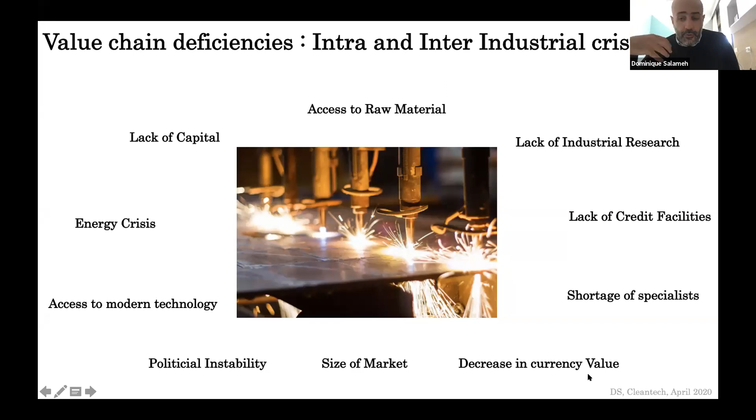So again, in a classical way of definition, you may have in mind that value chain is like the model of Porter's value chain, in picture, or some organizational schemes. This is true, because even this is lacking here in Lebanon.

Nevertheless, we will focus today on waste - solid waste, liquid waste, leachates - and its potential to fill gaps in the industrial value chain. As defined by the World Business Council for Sustainable Development, as well as the full product lifecycle analysis, waste is at the heart of the value chain. We can really see the terminology disposal and recycling, consumption and recycling, within the value chain logic, the industrial value chain logic.

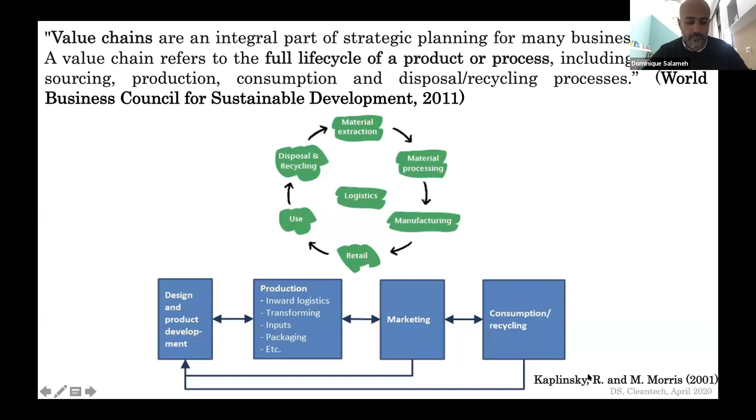In reality, and contrary to the common definition that waste is a no-longer-needed object, today we all know that waste is a subjective perception, as well as a process classification.

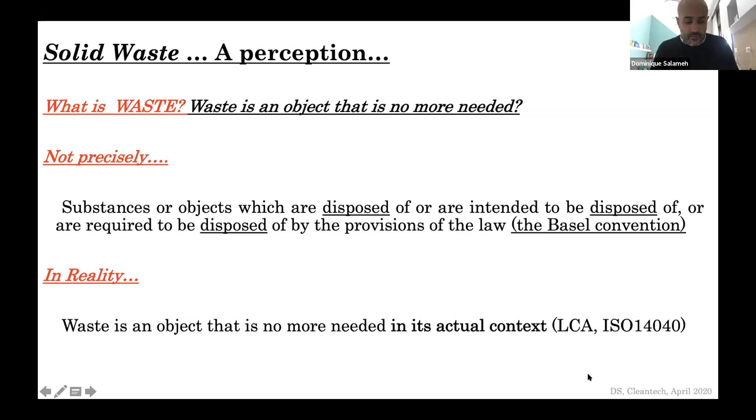Proper definition: an object that is no longer needed in its actual context, not in general - just for me, and now I do not need it.

Let us go into some examples. Practically, let us consider that process.

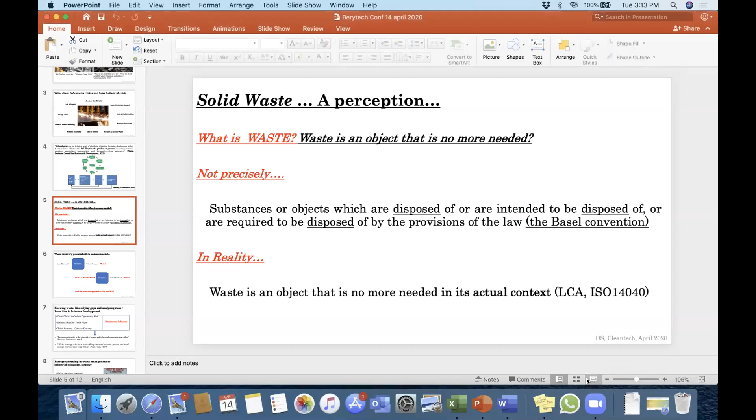I was saying just quickly that waste is an object that is no longer needed in its actual context to me. So let us take some examples.

If I am the person considered process A, I use a jacket, I get warm for a period of time in my life, and I no longer consider my jacket useful. I will put it in garbage - it is waste for me. Still, the jacket is a material that after processing - and here I highlight the terminology 'after processing', I will explain it later - is really useful for another user or for the textile industry.

Many examples in international or national benchmarks can be cited here, but I will just mention the Desigual model.

So the question is not the logic behind everything I'm saying here. If you noticed, I always mentioned 'after processing.' This means we must always have a revaluation process to make waste useful.

Financially, is it worth it? That question drove international economy for long decades. Countries prefer to produce what is lower cost, and where it is lower cost, to produce it there. Resources were abundant in time, and in-house production was not always a strategy - at least in Lebanon. Lebanon was in that economy model.

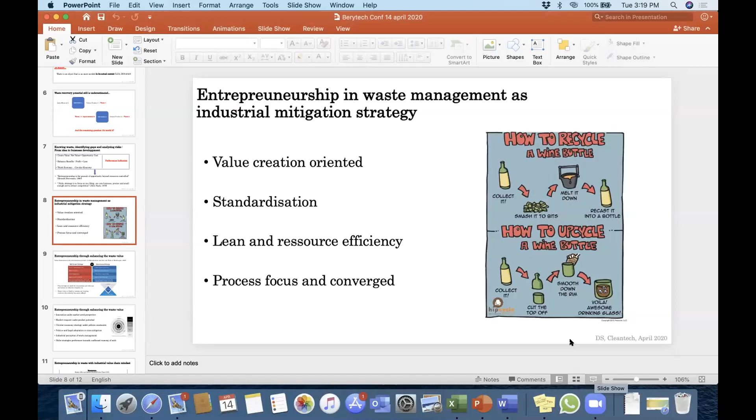So I was saying that entrepreneurship in waste management should be a mitigation strategy for industrial deficiencies in value chain. Because industry is about value creation, is about standards, is about lean and resource efficiency. It's about focus and conversion into one process.

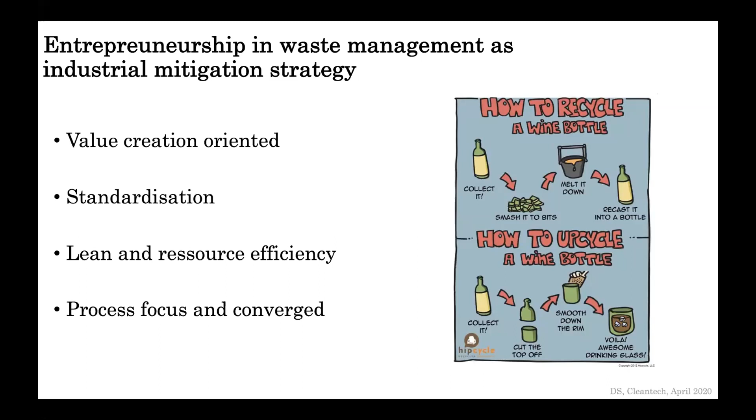And the feasibility studies should lead us to answers like, should I recycle or upcycle? And it's the market who will prime to answer on such question. Now, everything should be designed under what is called blue ocean strategies, not ancient classical strategies, to reach the entrepreneurship in solid waste management. The importance of knowing our baseline.

What is being done with our waste? What are our waste? What is the composition of our waste? What are the industry's need for our waste? What is the production of our waste? What are the plans in the countries for our waste? Blue Ocean strategy is to know exactly what everyone else in the ecosystem is competing on and to do something else, highest in value, lowest in cost, crucial in the value chain.

Let me give you some examples. If everyone wants to produce compost, go and create a lab for soil analysis. If everyone wants to burn waste, go and create local made filters. If everyone wants to recycle plastics, create link between producers and recyclers. Industry is about planning.

Enhancing the waste value is really challenging. Here I am listing a list of criteria which are prerequisites to such innovation, such as innovation under market need perspective, a market conquest under product potential, circular economy strategy under policies constraints, and so on. I will just focus on one example or several.

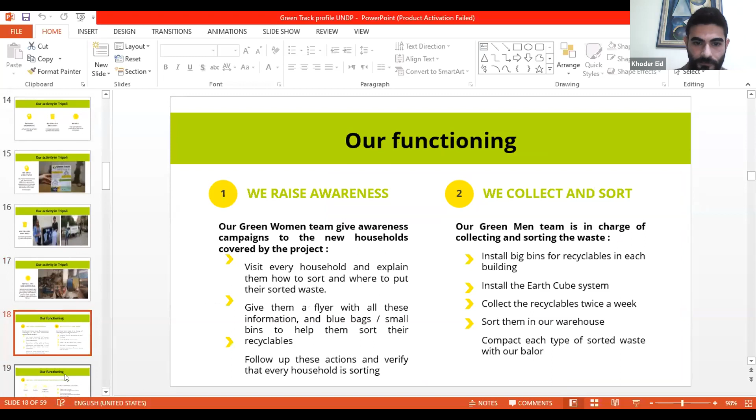Another example of how we can educate in Lebanon about sorting at source.

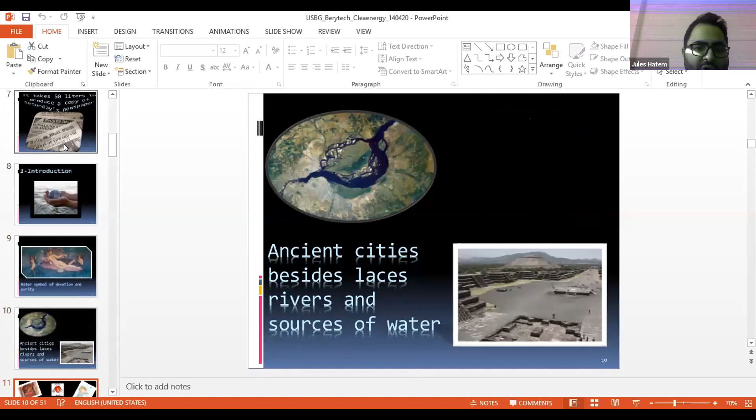Okay, great. So as we know, water is very essential in our life and critical. We use water to produce everything that we eat, everything in our life. For example, it takes 5,000 liters to produce 1 kilogram of rice. It takes 500 liters to produce 1 orange. It's a bit shocking, these informations. Water is the meaning of life. It enters our organism in every component.

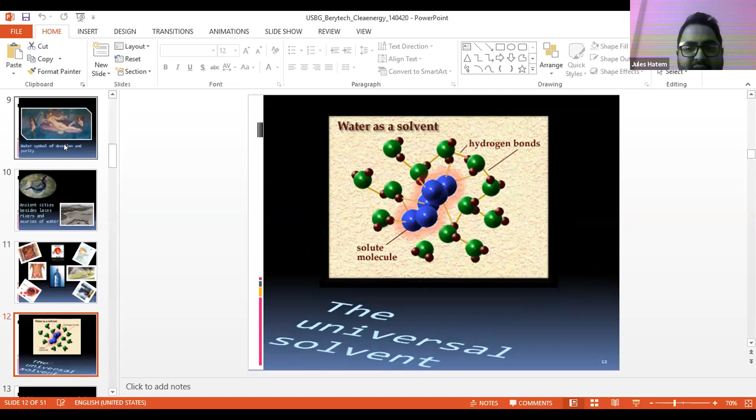The problem with water, and at the same time its characteristic, is that it's a universal solvent. It can dissolve a huge number of particles. This is an advantage and at the same time an inconvenience, because it can contain organic matters, inorganic matters, domestic sewage, industrial waste, microorganisms, etc.

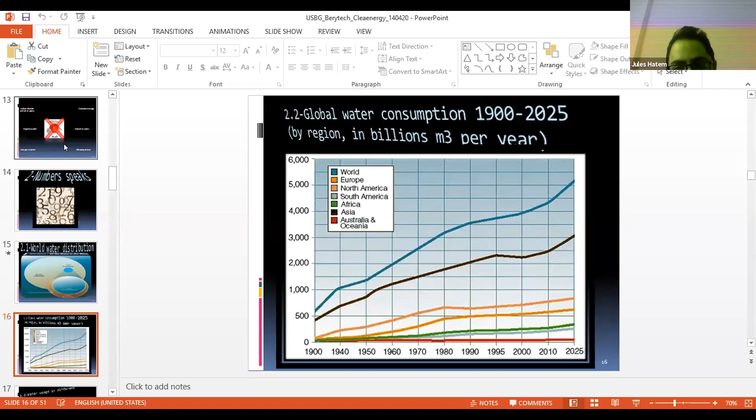Let's talk a little bit about numbers. For example, only 0.3% of our water in the world is usable for us. And the consumption of water is growing in an exponential phase. It's like the corona graph, you can see it every day on the news. So the consumption of water is a bit looking like the corona graph.

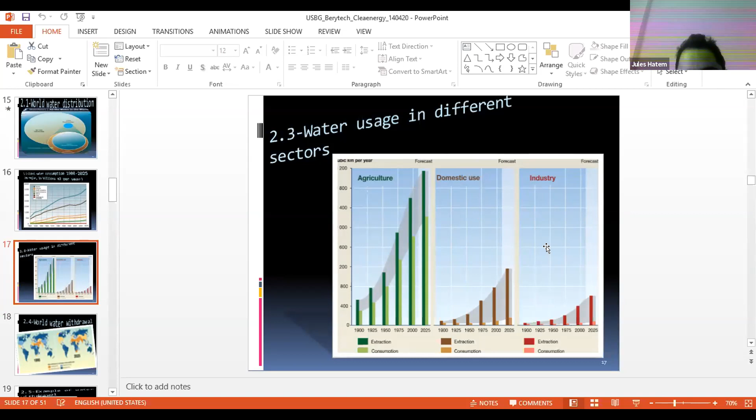And if we can see it in the domestic use, the difference is huge. So we preferred in Triple E, our firm, to concentrate on this part, the domestic use.

58% of the water is used outdoor and 40% is used indoor. Unluckily, we cannot control the outdoor usage on a personal level, but as for the indoor usage, we can interfere, and we can interfere with high efficiency.

In the indoor usage, 30% is for toilet flushing. So if you use, for example, 200 liters per person per day, more than 60 liters is only for toilet flushing. For clothes washers it's 23%, and for the faucet it's 14%.

The problem of centralization and decentralization in the reuse and management of wastewater is very essential here in Lebanon, because there's a big dilemma. I will take my time on this slide, because there's a big dilemma in our market, our state, and our government about whether to go for a centralized or decentralized solution.

Theoretically, centralized solutions for wastewater are more efficient in a powerful nation where there's a good government with high funds, high liquidity, and high decision making. But in a weak country like ours, especially regarding money and decision making, it will cause a big problem.

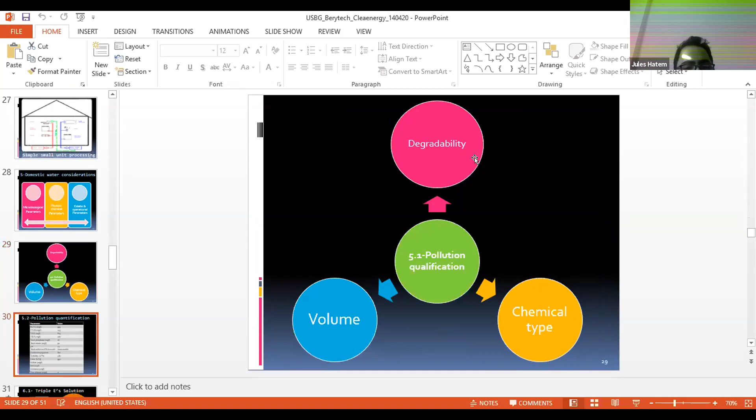So EEE took into consideration the wastewater problem and looked into different parameters - microbiological, physicochemical, and aesthetical - for the wastewater, through qualification of the volume, degradability, and chemical types, and quantification of the pollution, and offered compact or small micro wastewater treatment plants.

The innovation in this product is that it's very flexible. It can be fixed or mobile. Fixed, it can be a concrete underground tank with incorporated machineries to treat the wastewater. I'll explain a little bit about it.

Or it can be mobile - a steel structure tank, or even a plastic tank that can be a compact plug and play. So we can install it one day here in our village beside my house, and then move it to another house. Very flexible.

It can be above the ground and exposed, and it can also be underground.

It has a capacity to treat 1 cubic meter per day, equivalent to 1,000 liters, which is the consumption of 5 ordinary people. So it's for a family or small household, and it can go up to 250, 500, 750, and up to 1,000 cubic meters per day, treating water for a village of 5,000 people, but not more.

As I said before, I am focusing on decentralized solutions that can be adapted by the private sector. Very huge treatment plants are not affordable by the private sector - that's the duty of the state. But while waiting for the state to take that duty seriously, we have to solve our problem.

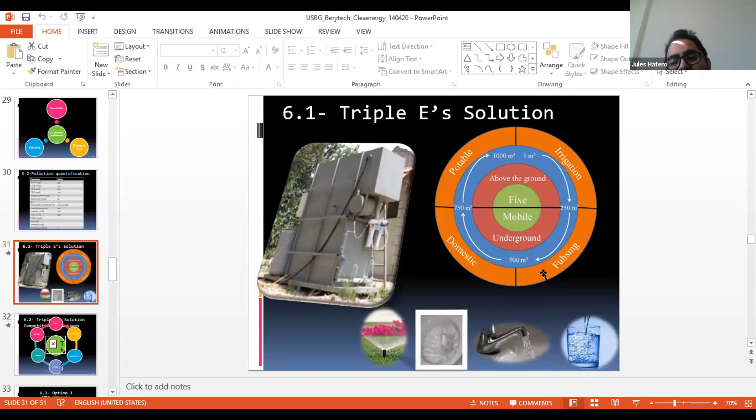But of course, the direct and operational cost for potable water treatment plants is high. So mainly and basically in Lebanon, we are going for irrigation and toilet flushing - treatment of black water to reuse back into green areas, or reuse as gray water for toilet flushing.

As I said before, the advantages of this plant are the price - it's very affordable for a small household or even a building of 6 or 8 apartments. The technology used can be advanced or moderate, based on the request of the customer. The maintenance is easy and can be done by ordinary people - no need for technicians or qualified engineers.

The consumption of energy is moderate. It's a patented technology and it's very flexible. As I said before, it can be used for different purposes, and it can be installed above the ground or under the ground, made of concrete, steel structure, etc.

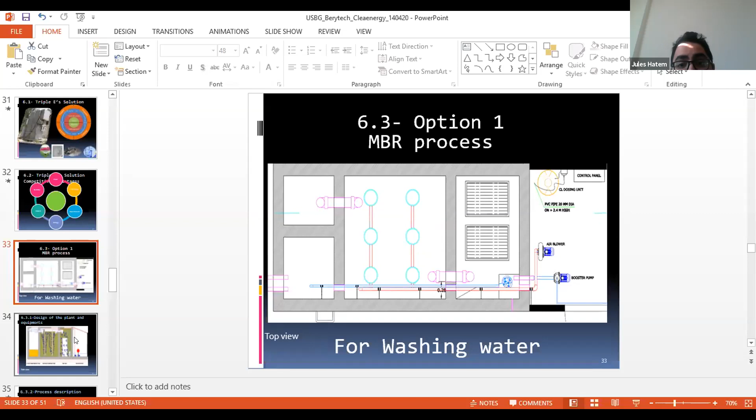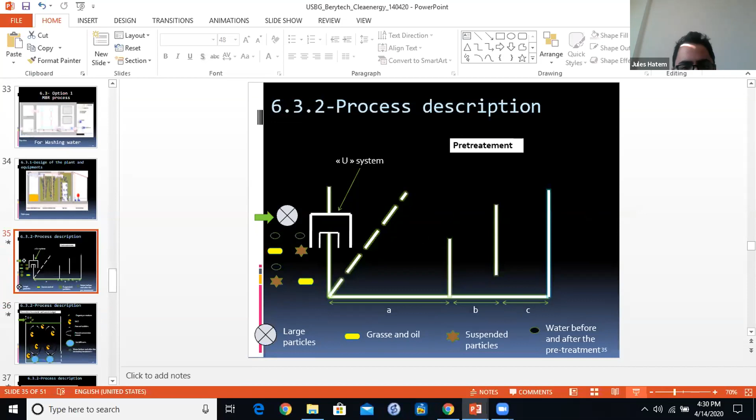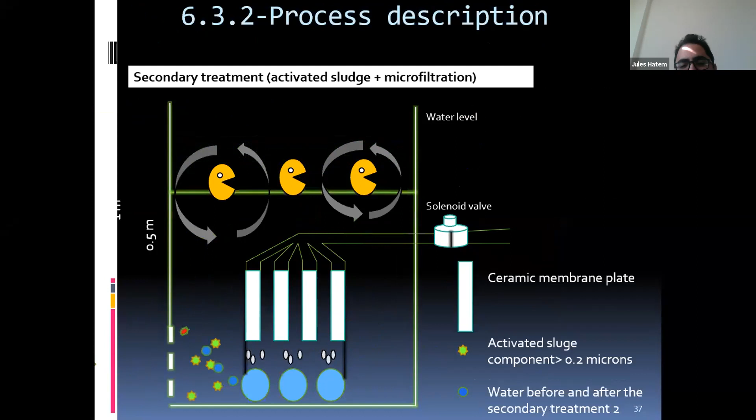Of course, we go through pre-treatment - a physical treatment to remove big particles we can see in the water. Then we go to biological treatment, a biodegradation done by bacteria based on dissolved air in the biological treatment tank. Then we go into the membrane process, the mechanical process, to do microfiltration and get very high quality water.

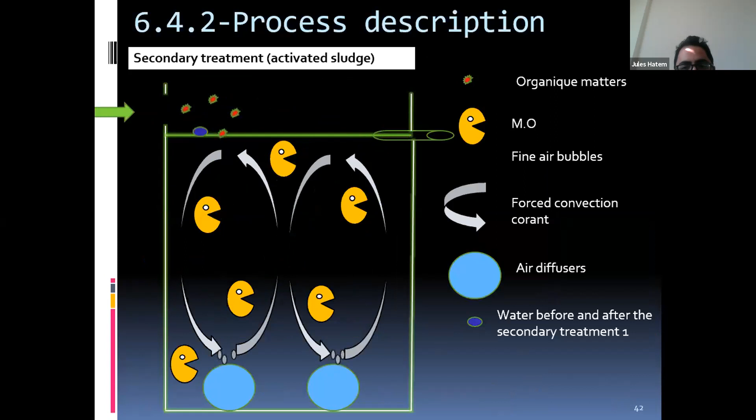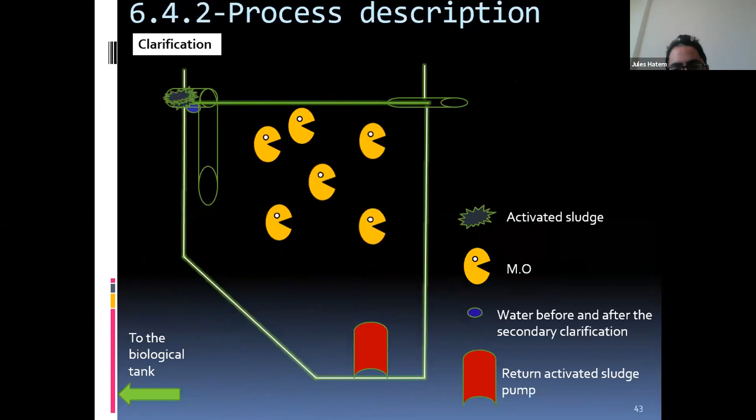If we don't want to use the water for drinking, we can go for irrigation water instead, which is a less sophisticated system with less energy consumption and direct cost. It's based only on pre-treatment, a biological treatment to remove pollutants like BOD, COD, phosphate, and nitrate, then classic sedimentation to settle the sludge for reuse and clarify the water to be aesthetically acceptable. Then a disinfection system removes microbiological components like bacteria and viruses, and the water can easily be used for irrigation.

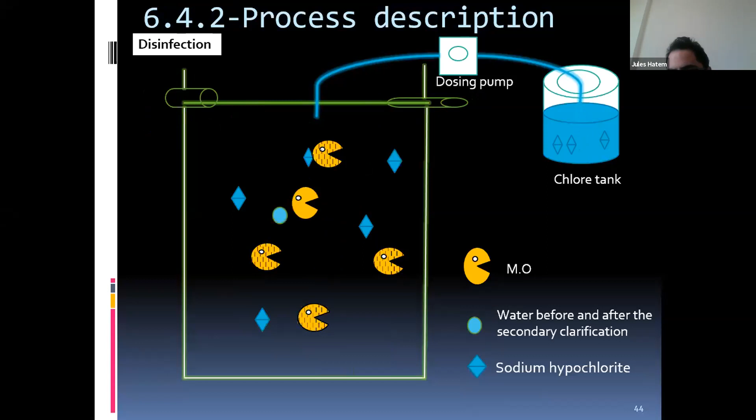Maybe I passed my time - I think so. So I am now ready, I won't continue with the presentation. I am ready to receive questions.

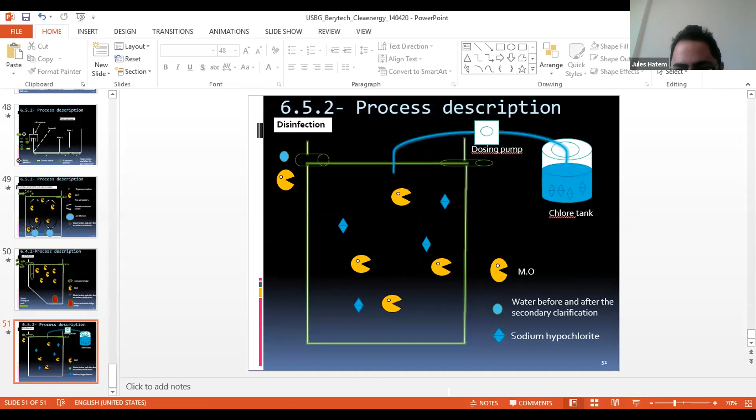What is the cost of such a solution for use up to 10 people, and running cost for irrigation? And is it available as a final product? Yes, of course, it's available as a final product. We've been providing these solutions across the country since 2012, so it's been 7 years that we've provided hundreds of plants.

What is the cost for 10 people? It's 2 cubic meters per day. If you want an ordinary treatment plant for irrigation for 10 people, a compact plug-and-play one made of plastic tanks can go up to 3,700 US dollars. The running cost of the plant is not more than $30 to $40 per month, between the energy and the disposables or chemicals like chlorine.

We have another question regarding cost, about maintenance cost. What spare parts could we need to replace? Is it available in the market? And maybe you can share the implementation cost.

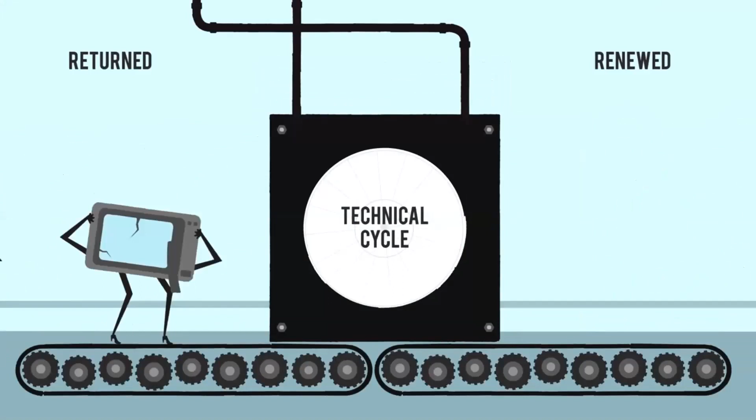It makes commercial sense. Instead of the throw-away and replace culture we've become used to, we'd adopt a return and renew one, where products and components are designed to be disassembled and regenerated. One solution may be to rethink the way we view ownership. What if we never actually owned our technologies? We simply licensed them from the manufacturers.

Now let's put these two cycles together. Imagine if we could design products to come back to their makers, their technical materials being reused and their biological parts increasing agricultural value. And imagine that these products are made and transported using renewable energy. Here we have a model that builds prosperity long term. And the good news is, there are already companies out there who are beginning to adopt this way of working.

But the circular economy isn't about one manufacturer changing one product. It's about all the interconnecting companies that form our infrastructure and economy coming together. It's about energy. It's about rethinking the operating system itself.

We have a fantastic opportunity to open new perspectives and new horizons. Instead of remaining trapped in the frustrations of the present, with creativity and innovation, we really can rethink and redesign our future.

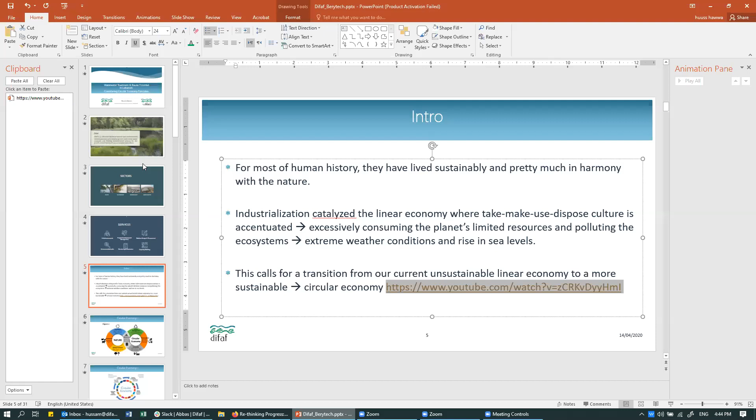Okay, very interesting. Yes. Now we can see your screen. Yeah, great.

Our current linear economy relies on cheap, easily available resources and fossil fuels. So I'm going back to my presentation now, thanks for watching the video. Basically this presentation puts into perspective what I want to provide now.

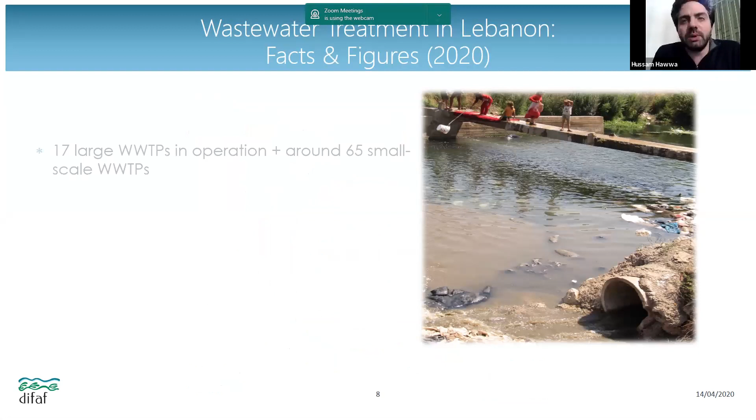Zooming down into our topic, which is wastewater - how does wastewater fit into this? We start from Lebanon. As our colleagues just mentioned, we have many treatment plants that are not really operational, although on paper they are operational. But we also have 65 small treatment plants - they're doing okay, better than the big ones at least.

But also most of these plants, when we talk small and medium, they have high capex and opex. Most are not operating properly because of lack of funds, lack of know-how, or just corruption, to say it out loud.

And they're not efficient, for many reasons. Some are not efficient because the wastewater networks are incomplete or missing. Or actually they have industrial wastewater in them, because industrial wastewater can impact treatment plants which are not designed for industrial wastewater - this is another issue.

This is why industrial wastewater is a very interesting gateway to start thinking about. One, because Lebanon is not a very industrialized country, and it's a good chance for us to grab these industries before the whole economy becomes too industrialized, and make it into a greener, circular economy based economy.

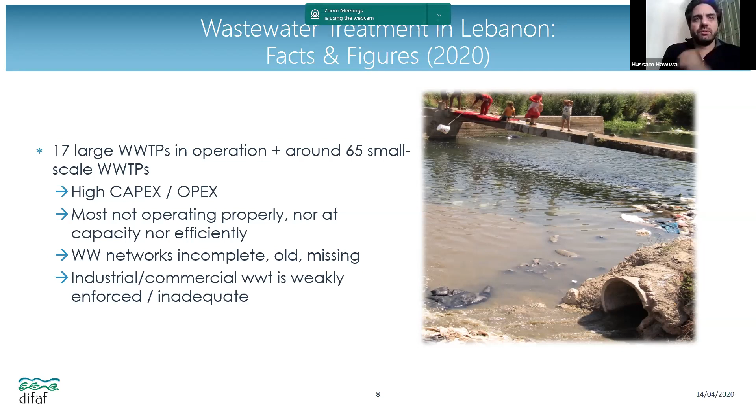So we're talking about the failure of centralized conventional systems, which are linear, as the video showed. Very quickly: we have 260 million cubic meters of wastewater per year. 60% are connected to a network, 40% are not connected. Out of the 60% connected, they go to treatment plants downstream, with 10% going to a functioning wastewater treatment system.

Out of these 10%, 30% are actually only primary treatment. So it's not really treatment - it's basically just a preliminary phase of treatment.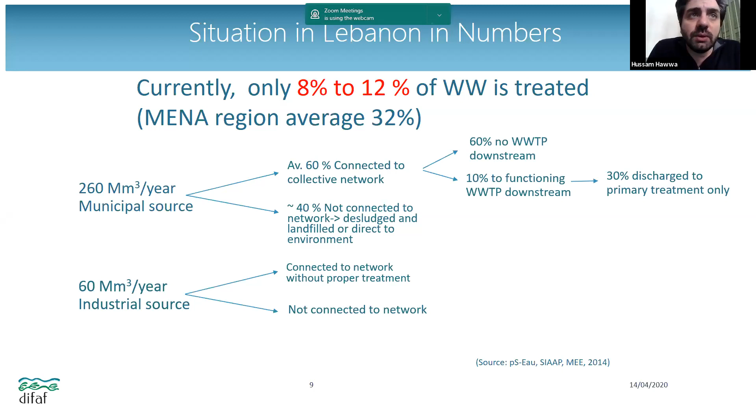From the industrial source side, we have 60 million cubic meters per year - unknown statistics, as my colleagues also mentioned. Dominique said we don't know the statistics of these and we need a lot of secondary studies. So basically some are connected to the network, and some directly dispose into the environment. Those connected to the network actually impact the wastewater treatment plants we've built, making them less efficient. And the ones going to the environment have huge environmental impacts, as we know.

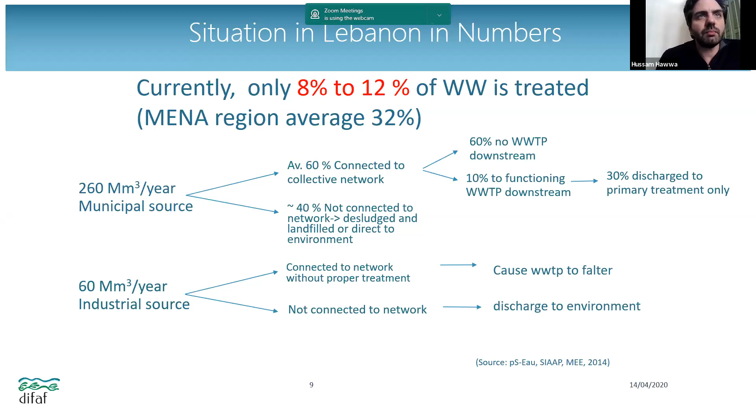Very quickly, treatment plants take in rainwater, domestic wastewater, and sometimes industrial wastewater, as we saw. In Lebanon, we have solid waste generated from these treatment plants - sludge basically - and other waste that go into landfills. We don't have incineration, so it doesn't go into energy production, and we're not officially using them for agriculture.

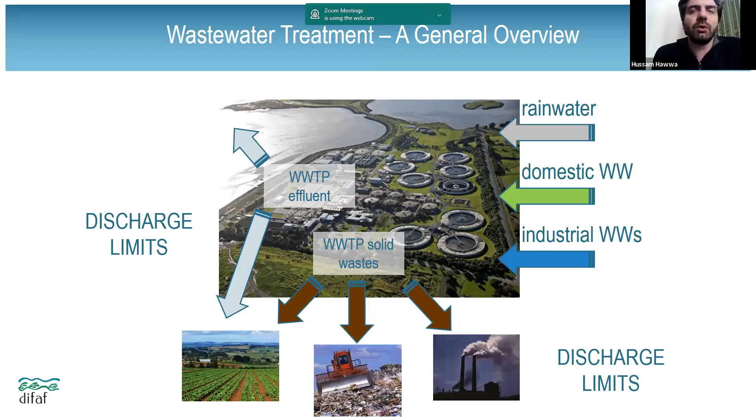Of course, unofficially many things are happening - most of the unofficial work is actually dumping this waste sludge into the environment directly. And from these treatment processes, we also have effluents going into the sea, river systems, or to irrigation, but not really, not yet, because we don't have any legal framework for that.

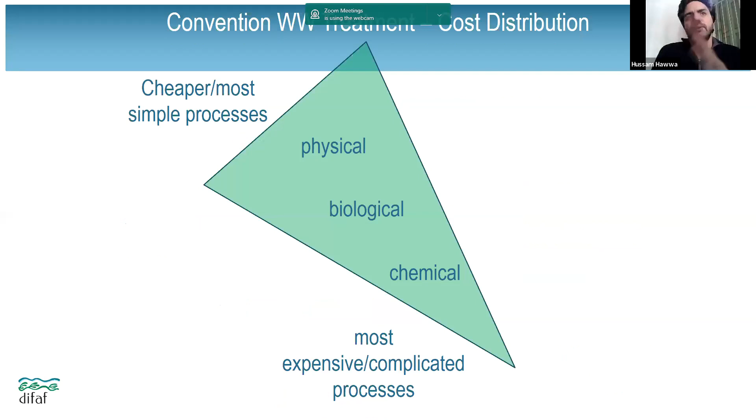Now with the linear processes, I just want to focus on this linearity - physical, biological, chemical - these are the steps usually taken, usually from cheaper to more expensive. So we have raw wastewater going in, preliminary treatment, then clarifier and primary treatment, which is physical. In the secondary systems we also have biological treatment that is sometimes aerobic or anaerobic.

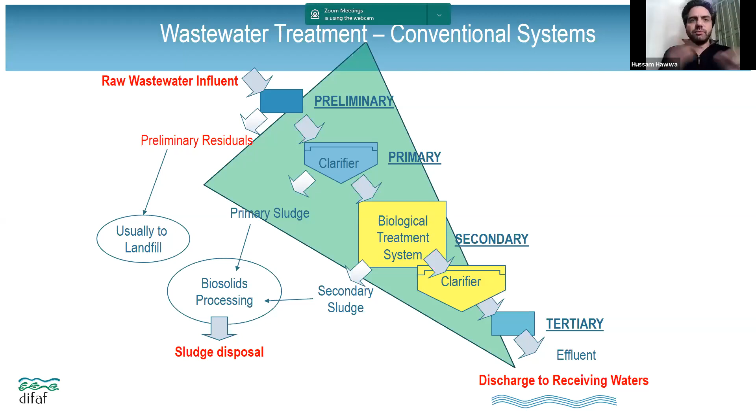And from all of this, we can see on the left side how much waste is actually produced throughout this process. We have sludge from the preliminary residuals and the primary treatment, and sludge coming from the secondary treatment. And of course, in the end, we have water that, if treated well, goes to the environment. If not, it's actually also a waste.

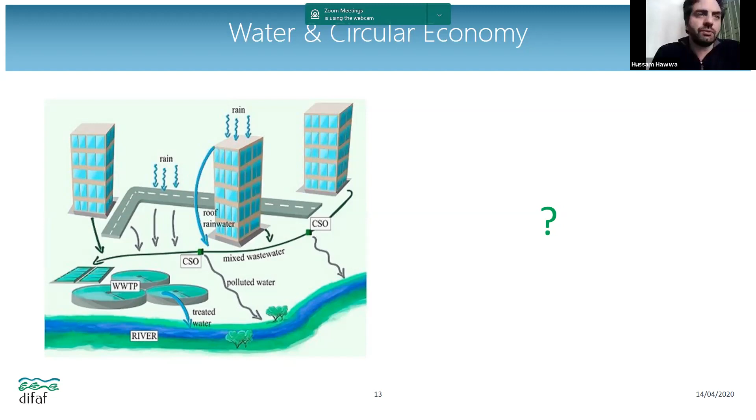However, in the circular economy, we can see how much more possibility and potential we have. First, if we look at the treatment plants themselves, we can look at smaller systems or biological systems like constructed wetlands, where we have less chemicals and lower energy use intensity, and operational cost is much lower. From these systems, we can recover nitrogen and phosphorus to fertilize crops.

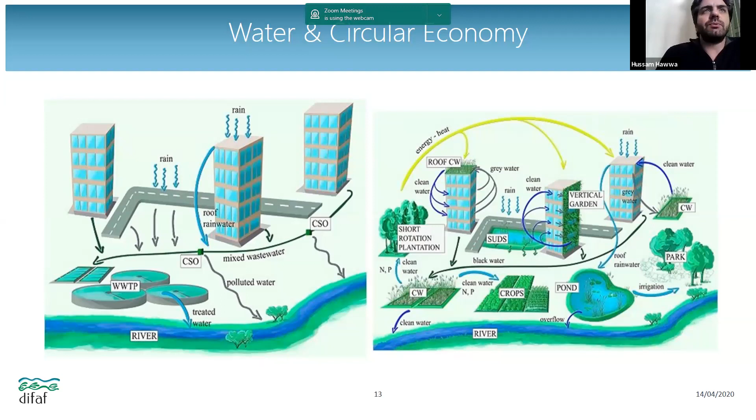And of course, we can talk about rainwater harvesting, where we can feed back into the environment, whether in ponds, irrigation, or the river systems themselves. From these, we can also put wastewater systems on rooftops or in communities at a small scale, or do vertical gardens, etc.

So basically, we have to move from wastewater treatment and removal of biogenic compounds to thinking about priorities where we preserve natural resources, minimize the water footprint, and use these processes in the treatment plants themselves. For example, energy production we can use in the treatment plants to save energy. We're going to see examples in a bit.

For disposal of sewage, we can look at recovery of raw materials, energy production, and disposal. Energy can also come from sewage sludge, and utilization of biogas energy. From there, we can think of recycling that energy into the system, and the surplus energy can also be sold into the network.

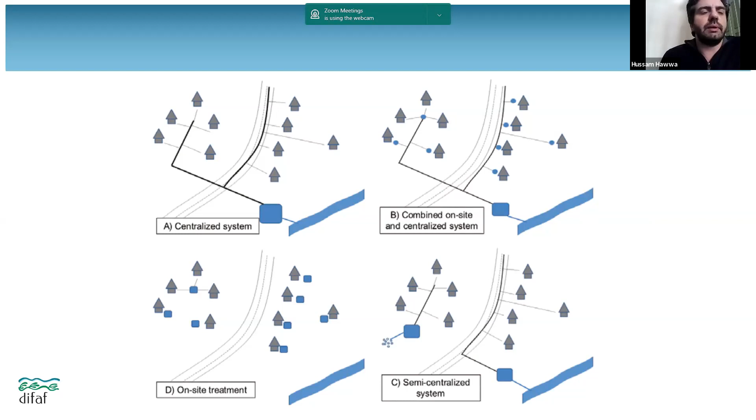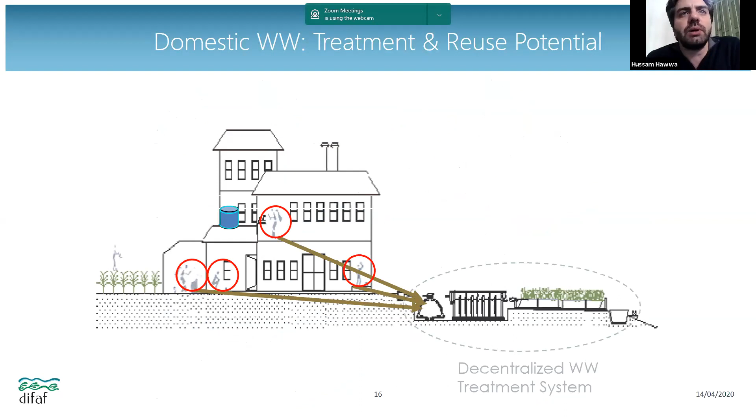Just to give an example of what you can do in the house for wastewater management, here you have different wastewater coming into a small biodigester, and then an anaerobic baffled reactor where it is also treated anaerobically. And then this water is polished with a wetland, and then the water is treated.

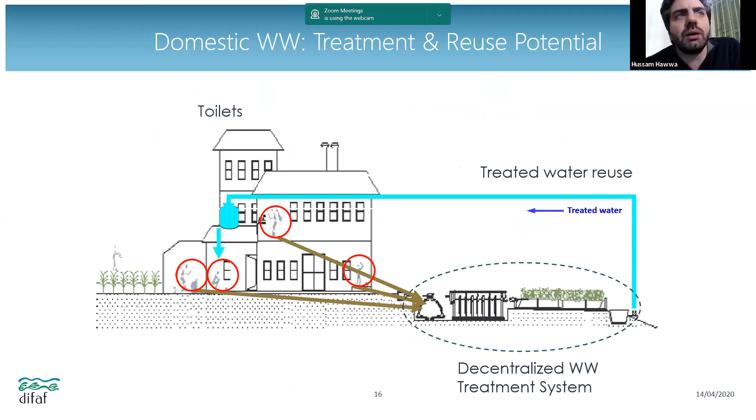This water can be reused in the house for washing, for toilets, and for irrigation, and the treated sludge can also be used as fertilizer. And of course, the water in the end can also go to the river, which is now welcoming this water because it's clean.

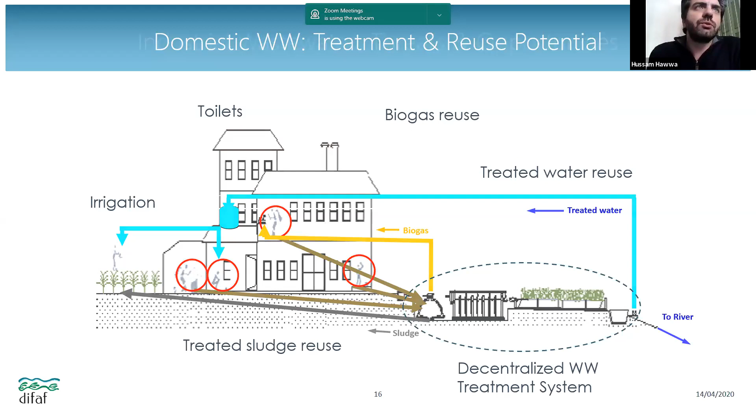So going into industrial wastewater, we have to know that it's a bit tricky. One, because it's very polluting—the BOD is 100 times more than domestic wastewater. It's laden with chemical and heavy metal components, dependent on variable production cycles, expensive and complex to treat sometimes, and expensive in the sense that if you don't recover any of these resources.

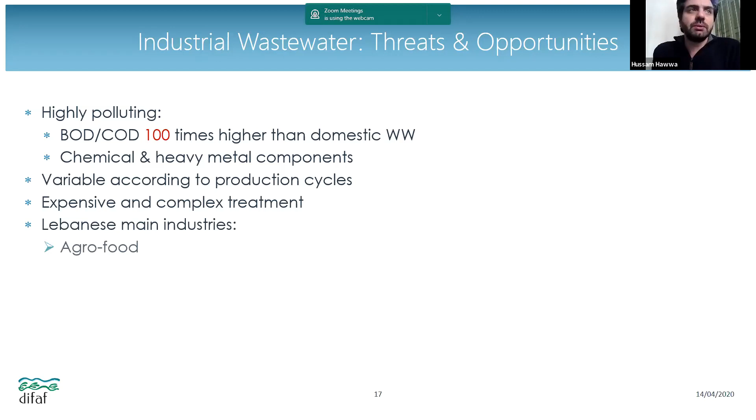Our main industries in Lebanon are, of course, agro-food, construction materials, cement, chemical products, printing, packaging, furniture, and wood. But actually, all of these are still medium-scale industries—they're not really heavy industries.

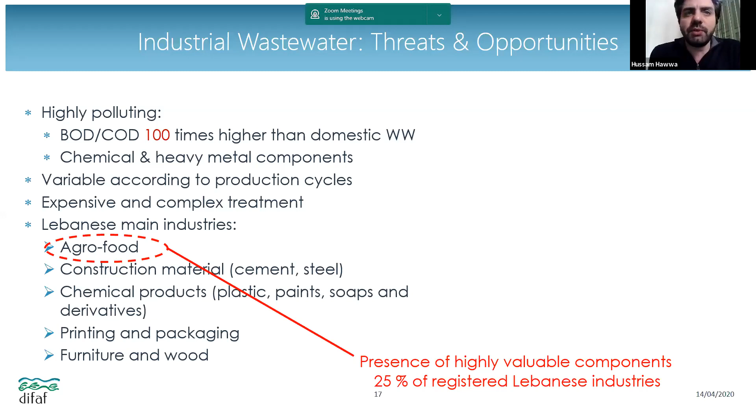In the agro-food industry, it actually has the highest potential for circular economy because it has very valuable components. These almost form 25% of our registered industries in Lebanon.

Just to give you a very quick sneak peek, we have this agro-food coming from slaughterhouse waste. We can use protein hydrolysis in slaughterhouse waste to produce keratin from the hair and collagen from the hide, and amino acids from other supplements or substrates.

In livestock production, we can also produce antioxidants and feed supplements, which we're going to see in a bit.

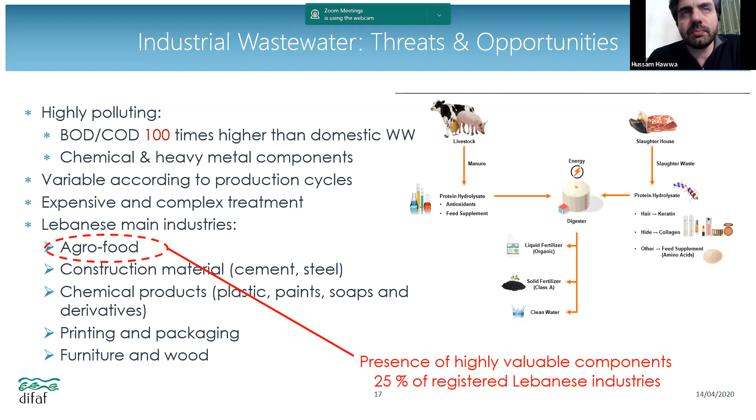The digester itself can produce energy, liquid fertilizer, solid fertilizer, and clean water. This valorization, looking at wastes as resources, is the main topic of today. Throughout all these industries and options, we always have the consistent resource of water, and this is why we love water so much, because it's always there, and valorizing it is always very valuable.

When you reclaim water throughout these industries, you can use it for potable water, agriculture, irrigation, industrial washing, or reuse in the industry itself, domestic non-potable uses like swimming pools and toilet flushing, groundwater recharge for environmental benefit, and return to rivers as an indirect environmental use.

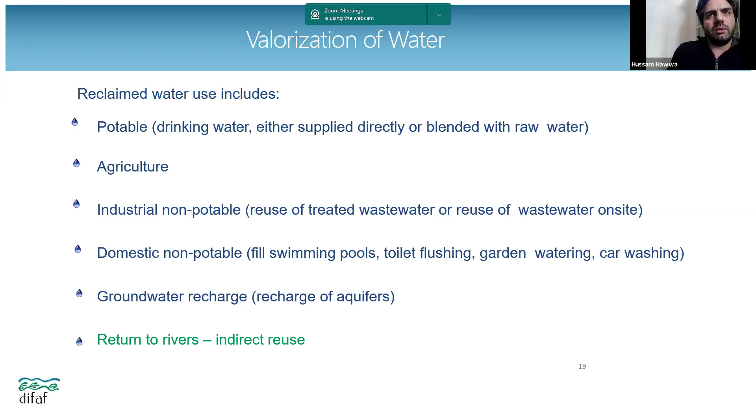Now let's look at some examples, starting with animal farms. From them we can take methane gas through digesters, which is anaerobic treatment. Later, through further treatment, we can get organic ammonia and solid fertilizers for soil conditioning.

We can also further treat the water into very clean water, or not treat it, but the slurry can also be used as fertilized water for irrigation.

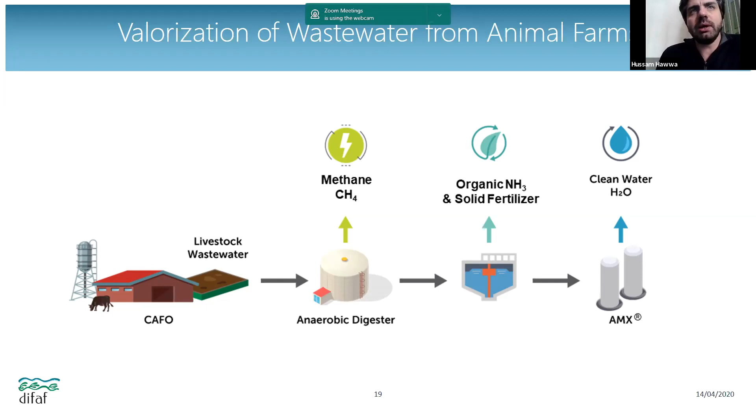If we look at wastewater treatment as an industry itself, we also have a lot of potential, because sludge is a highly biodegradable and important resource for energy. We have many examples in countries using sludge for energy production.

From this sludge we have thickening, dewatering, conditioning, and drying. These are the main processes before putting it in the biodigester that produces methane gas. There's a bit of post-treatment where you have to take off the sulfur, but it's not a big deal, and then this sludge can be used for energy production.

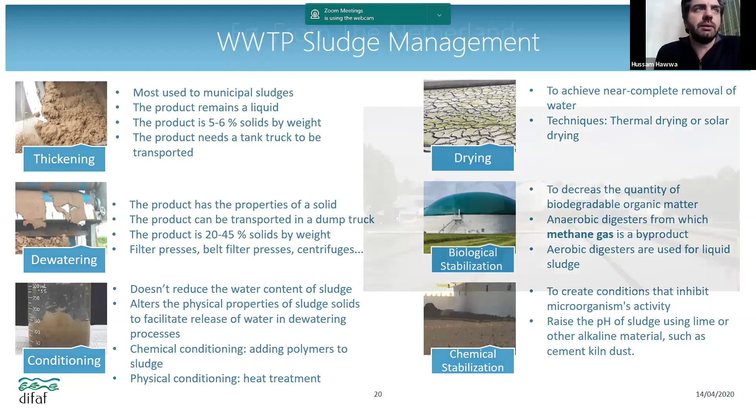50% of the phosphate recovery, called struvite, is sold as fertilizer. The rest of the sludge is dried and used as carbon for energy producing facilities. This all saves around 2,500 tons of CO2 per year, and this is an ideal plant. I'd advise you to look it up if you're interested.

Of course, in Lebanon, one of the biggest industries we have is olive wastewater. We're not going to go through the whole process of olive oil extraction, you'll probably learn it later. The wastes, like olive leaves and wood, can be used for animal feeding or composting.

Other byproducts include olive mill wastewater. We're going to show you very quickly what kind of important pharmaceutical products we can produce from there. Olive cake can also be used as energy for briquette making, and other byproducts like olive stone can also be reused.

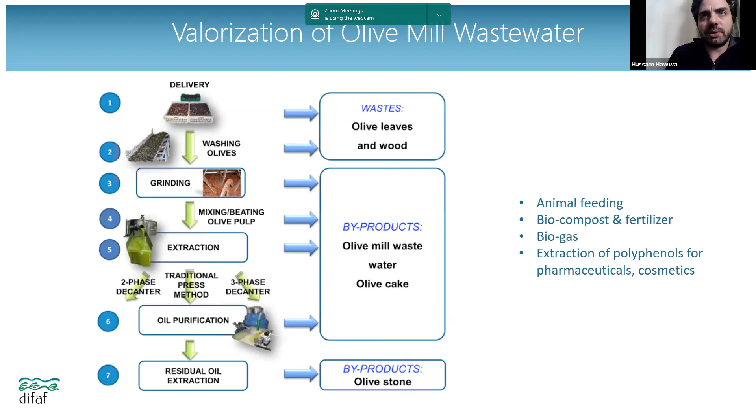So you can see in one industry how much potential use we have, particularly for the water that comes out from this system. We can also get very high value products in the medical and pharmaceutical industries and the food industry, like polyphenols, which have excellent biological antioxidant properties used in medicines and others.

Mannitol is used in pharmacy as a stabilizer for other treatments, along with low-calorie sweeteners. Pectins and oligosaccharides can be used as prebiotics and dietary supplements. Other products can be used for the pharmaceutical industry. All of this can be found in olive wastewater production, and we virtually have none of that.

Why is it not going? It's not moving.

The treatment and recovery products can be used for animal feed if we talk about the stems mixed with leaves. The pomace, through solvent extraction, can be used for dietary supplements. Pomace aerobic biodegradation can turn into biocompost, and pomace can also be used for biogas.

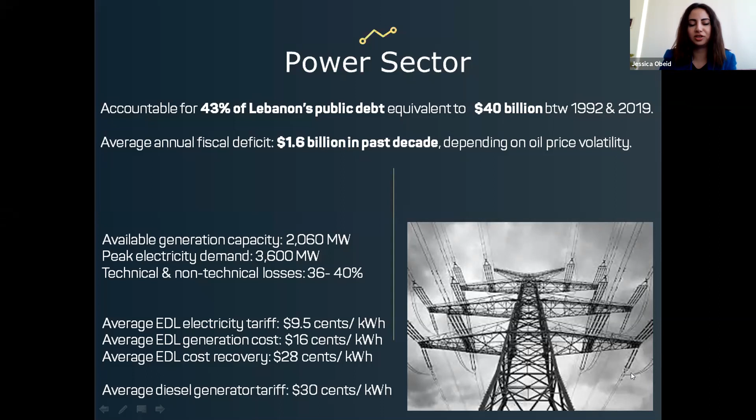And on the other hand, because the electricity utility cannot meet all the demand, and we don't have 24/7 electricity, and we rely on diesel generators, the diesel generator tariff is 30 cents per kilowatt hour.

As we've said, the electricity sector has contributed to 43% of the public debt. We have an outflow of foreign currency reserves for fuel imports because Lebanon imports around 91.9% of fuel for the energy sector. And a large share of that is also for electricity, as we only have installed renewable energy capacity of 7%, and that also includes hydropower.

We have a value of lost load because that electricity that we're not actually generating has a value, and we call it the lost load. And there's a very high cost on businesses. They have high operating costs, low competitiveness, whether we're comparing to the regional or international levels, and we also have low exports.

So the productive sectors in Lebanon contribute around 16% to the GDP, but they employ 26% of the labor force. Of course, employment now is very important because we have a very high unemployment ratio. And if we look at the trends in the Lebanese economy, even when the GDP was increasing, unemployment rate wasn't decreasing. So we have an economy that doesn't create jobs. The employment opportunities are very important.

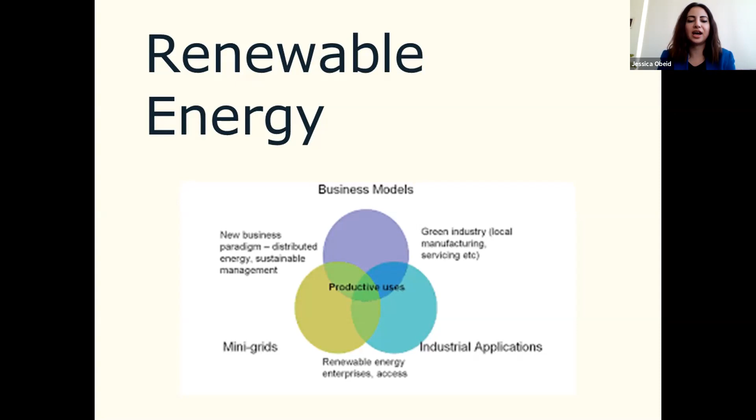If we look at what can provide all of these goals, we end up with renewable energy—especially decentralized renewable energy models—which can support all these productive activities. They can generate affordable, green, environmentally friendly electricity access, enable new business models, drive job creation and innovation, and provide stimulus for the economy. This is very important for Lebanon.

This example is a bit far-fetched, but I'm just showing the potential in different sectors. In Hungary, they've launched a 1 billion euro renewable energy project for agricultural centers on the border with Slovakia and Austria. It will cover 330 hectares, based on renewable energy—both photovoltaic and biogas—and will include a geothermal plant for cooling purposes.

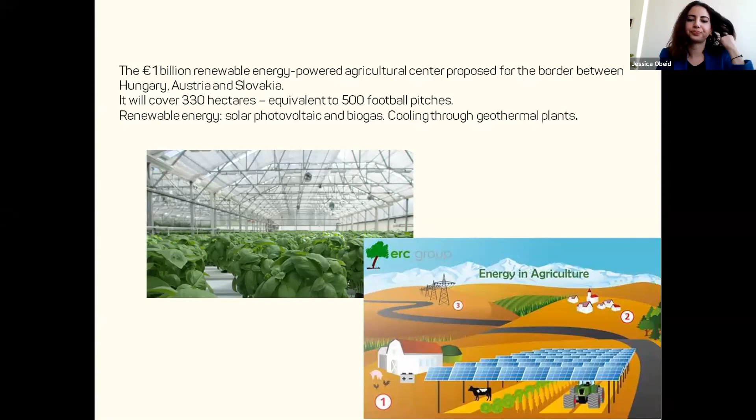Do I still have time?

In the challenges, we of course face several challenges as well, but there are ways probably, and this is where entrepreneurship and startups can play a role in driving new energy models. We definitely have the financing schemes, but Berytech is also providing some sort of financial support, if you're applying for the Cleantech fund.

We have a legal framework, which is the most problematic issue in Lebanon, where by Lebanese regulation only EDL is allowed to generate and sell electricity, unless it's some sort of developer that has a license. But there are also issues with the regulation and licensing, so we don't have a consistent policy. We also don't have a power wheeling mechanism which allows users to implement renewable energy technology in a land somewhere and offset the electricity consumption somewhere else. But we have a net metering scheme.

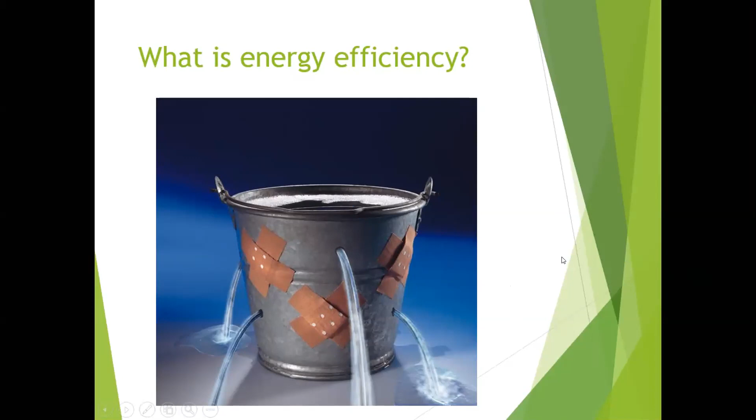So what is an energy service company? An energy service company is a company that performs studies to find ECMs, energy conservation measures, which are solutions that lead to energy savings. We do this on two axes.

We do it on buildings that are existing, for example the building you are in now, hospitals, or buildings that are in the design phase. So we sit with the designers and make the building optimized from day zero.

Today I'm going to focus on energy audit for existing built facilities. I'm going to talk about the process, how to do an energy audit, briefly of course, what are the elements involved in it, and then I'll give a brief case study, and leave room for your questions.

As I said, an ESCO, energy service company, is in the middle and is like a bridge between many entities. Firstly with the client, when you sign a contract with a client, but it also gets involved with energy suppliers like EDL or equipment suppliers, meaning the parts - you have VFDs, fans, chillers, whatever.

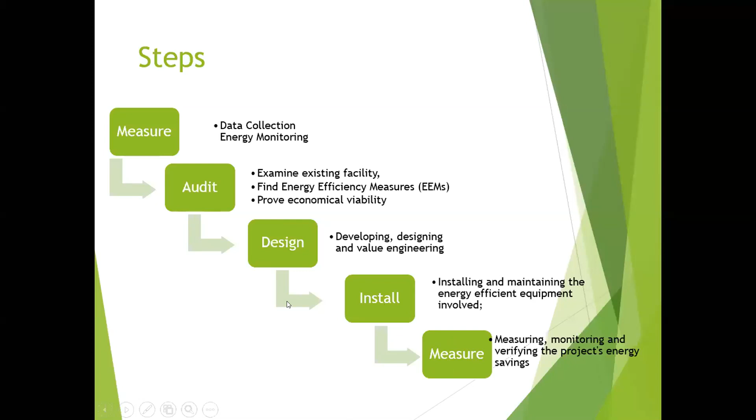And in order to measure, you have to put sensors on different equipment, the process, the lighting, the chillers, the boilers, and IT equipment, through an IoT-based system.

So if you see now in energy efficiency and energy audits, lots of fields are available. You have mechanical engineers to assess HVAC systems, electrical engineers to assess the grid and electricity, and programming and communication engineers to do the programming and networking of the system, installing the IoT devices.

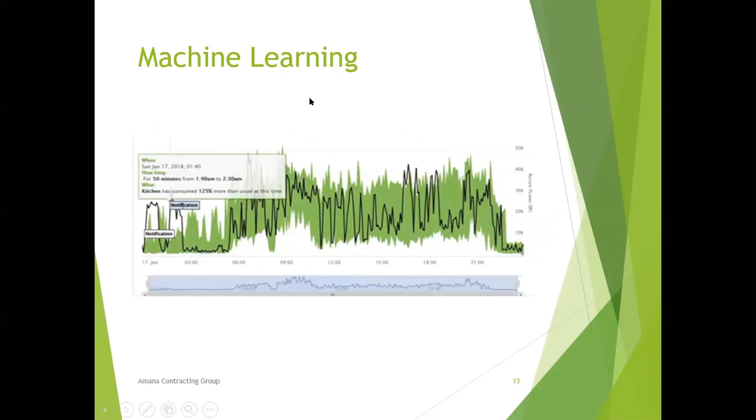And with the monitoring, you will have a feel of the THD, or if there's any noise in the system. You'll understand the demand in kilowatts and what's happening during the day and night, how the load is going. So you can do energy management.

For example, in Lebanon you have triple tariffs in the industries. So from 4 till 8 p.m. in the summer, you have a tariff of 21 cents per kilowatt hour, whereas at night it's only 8 cents. So during the peak hours on EDL, you can tell them to turn on the generators, because on the generators the cost is 17 cents nowadays. And you will reach a conclusion to have a baseline year, which is the actual consumption.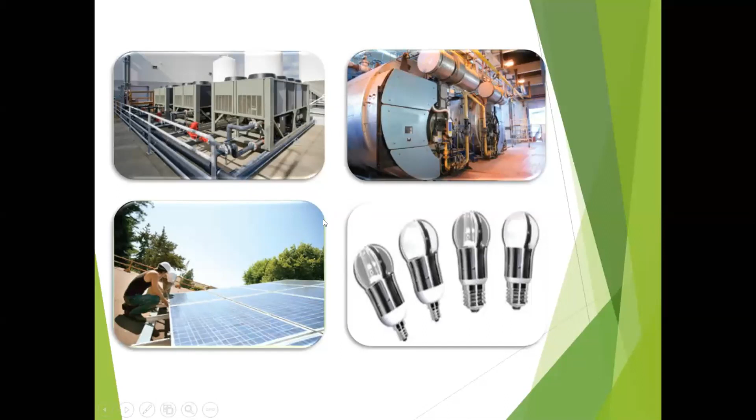Now, what usually happens is when you take the 2019 bills, you have a specific consumption. For example, due to Corona, his consumption will be much less because there's less production and no operation. So the client will come and say, 'No, the saving is because my production decreased, not because of your energy saving project.'

And how do we solve this? It's a really interesting subject called measurement and verification. So before implementing the project, we create a formula based on linear regression where we put all the variables that could affect the energy consumption and the energy savings.

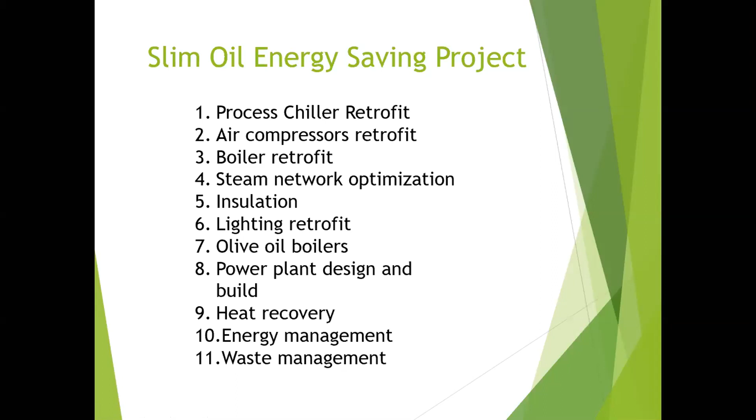Now I'm going to give a quick example about heat recovery from the generator. The generator is 40% efficient, meaning if you put in 100 liters, only 40 liters are used to produce electricity, and the balance goes to waste — 60% goes to waste. From this 60%, 35% goes out through the exhaust and 25% goes to the coolant, which is the radiator.

So what we do is use this 35% from the exhaust to produce steam in this factory. You have the generator and the exhaust, and we put a heat exchanger which produces steam. The steam is injected in parallel with the actual boiler.

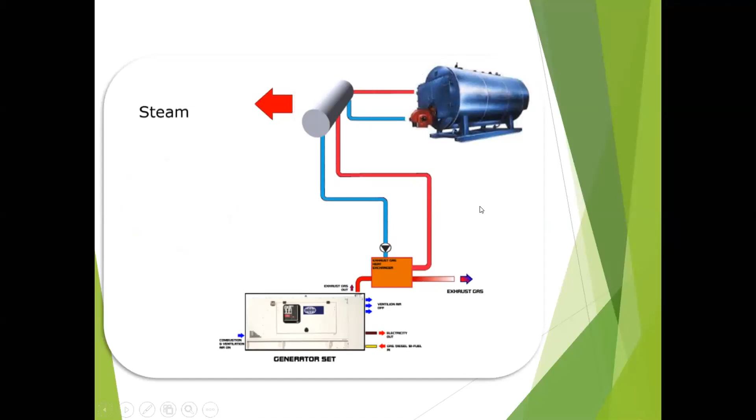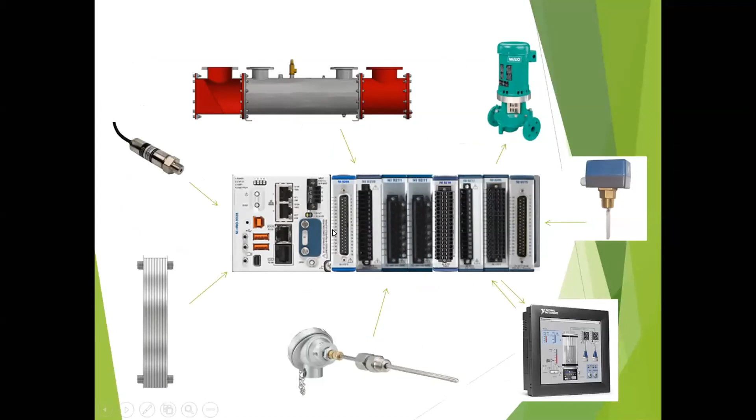So in order to do this, you have to include sensors, heat exchangers, pumps and screens, and you have the PLC which you have to program. So here comes the role of the process engineer, the control engineer, or the computer engineer.

So in that case, we had 3 generators of 670 kVA, 2 of 670 kVA and 1 of 320, and they were running at 12 hours. So we could produce between 212 and 414 kilogram per hour, which is around $81,000 per year. At that time, the cost of diesel was $700 per ton.

Jal? We have many questions. Do you want to take them? Okay I'm done here. Let's go, perfect.

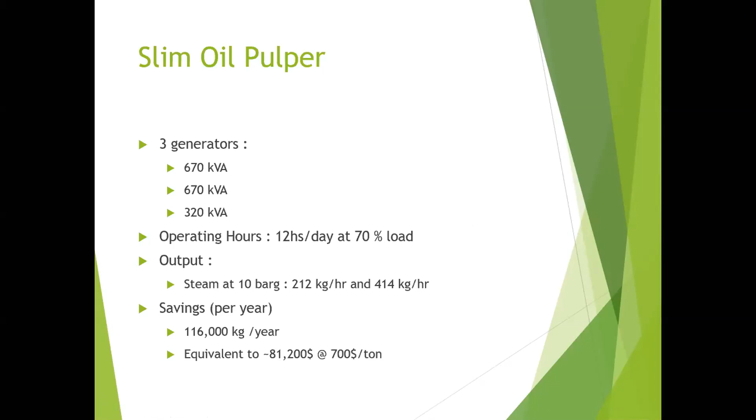So for example, I'll give you an example. For this project, the investment amount is 200K. The saving is 81,000. So the payback is 2.46 years.

I'm not going to talk about the financing part because it's really complicated for now. So I just wanted to end with this: we cannot solve our problem with the same thinking we used when we created them. So when we needed, for example, for the generators, something to produce energy, we created the generator. But the generator has many problems, and it's only 40% efficient. So we need solutions to make it either more efficient or make use of 100% of the waste. Thank you.